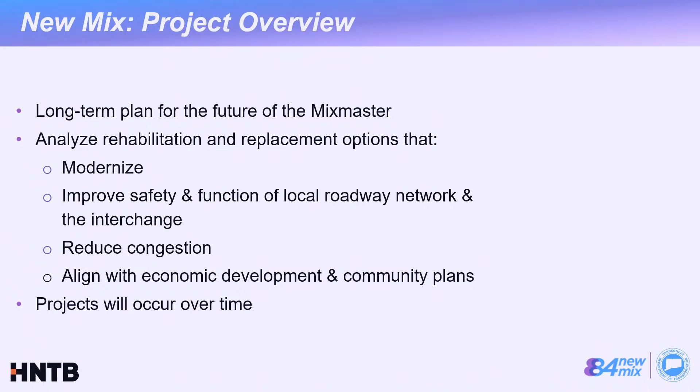So getting into these early action projects, they're smaller, standalone type projects that are either improvements to the highway or to the local roadway network. They're intended to improve safety and traffic operations. These have been coordinated with the City of Waterbury, and there's a review process that's separate from our New Mix Mixmaster study.

So this is the area that we're talking about, just to orient everybody. I-84 is running left to right across the screen. We've picked out some landmarks to orient you to where the features are. Route 8 is running top to bottom, with the Naugatuck River paralleling it.

These lines here in blue are the improvements to the local roadway network, and also on that stretch of 84 between exit 21 and 22 that my colleague Rudy will be going through later in the presentation.

To get into the project need of where this came about, this was identified when we were doing our initial analysis needs and deficiency study on the interchange, and this project materialized as a good project that would meet the criteria for an early action project.

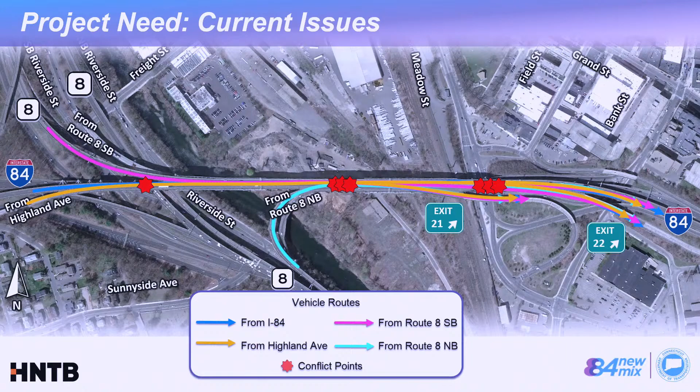Laying these all out on top of each other, with all these movements and decisions that cars need to make, we end up with a lot of these conflict points.

In our analysis, during that initial phase of the needs and deficiency study, we collected traffic data from 2017. What we're able to do with this traffic data is model it with engineering software - a program called VISSIM. It models traffic, so as you're seeing these rectangles, the larger ones are trucks and cars operating here on 84.

And this here is the entrance ramp from Route 8 northbound, coming up on the left. You can start to see the conflict points that we were identifying, where people are looking to make these decisions.

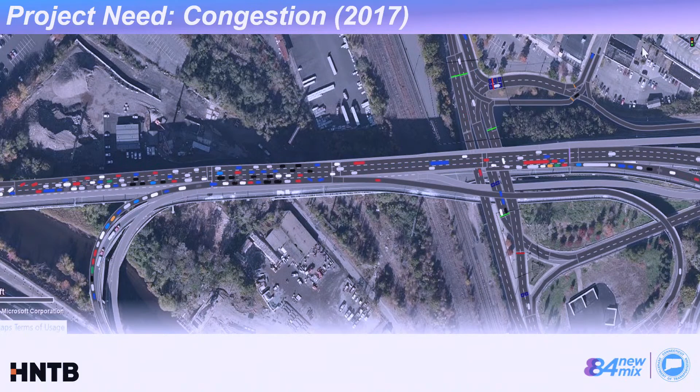Our long-term plan for the Mixmaster is to replace it in the year 2045. Showing you analysis from 2045 wouldn't have been useful, because by then the whole interchange would be replaced. So we did some smart analysis, and determined that in the year 2031 is where congestion and traffic operations on I-84 eastbound would really reach a failing point.

So this is how the traffic would operate. Doesn't want to play for me. One more try. All right, we're going to bypass that.

So then the traffic, similar to how it was in 2017, we were getting 14 more years, and it was really congesting Interstate 84 eastbound, causing long backups and queues on the interstate itself.

So just to recap the summary on the project need, we have a lot of substandard distances for the merges, weaves, and diverges. We have that short 350-foot auxiliary lane coming on from Route 8 northbound that drops off at exit 21. Another 740 feet further to the east, we have exit 22, a high crash location where we have recurring congestion and deficient traffic operations. And exit 21, highlighted there in red, that bridge is also in poor condition, which would need a major rehab. So that's the reason for the project.

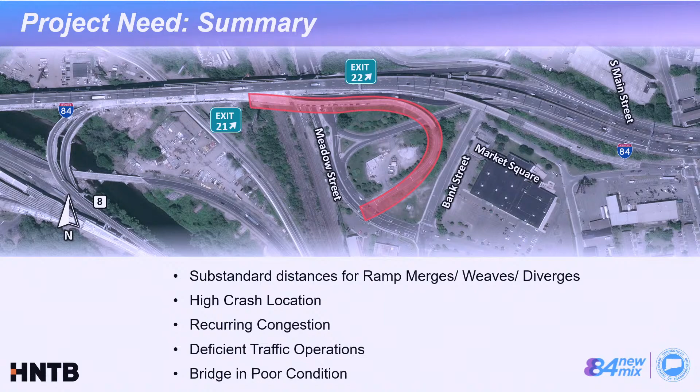Now I'm going to turn it over to my colleague Rudy Franciamore, who's going to walk you through what improvements we're going to make with this project to this area.

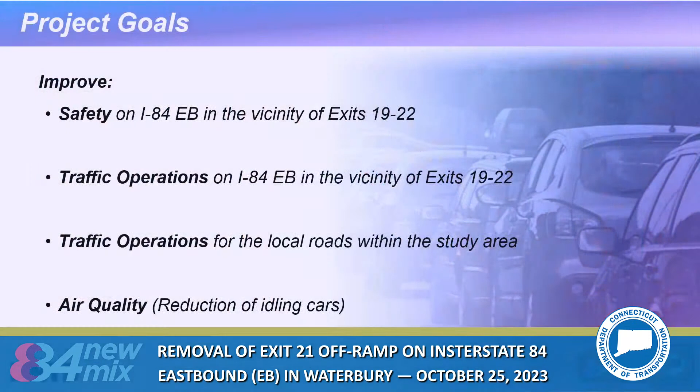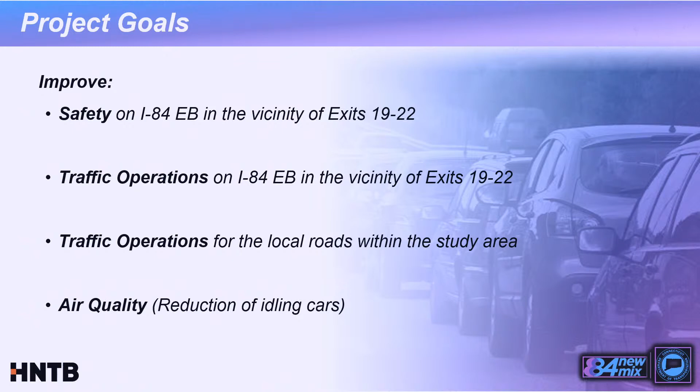Thank you, David. Again, my name is Rudy Franciamore. I'm the project manager for State Project 151-340, and I'm going to be getting into the proposed design for the project. The project goals are, number one, safety on I-84 in the vicinities of exits 19 to 22, as well as the traffic operations in that same area. Ancillary to that are the traffic operations to the local road network. As another benefit, we are anticipating air quality to improve in the area with the reduction of idling cars.

David explained in great detail the location. We determined that by closing exit 21, we're going to be able to dramatically reduce the amount of congestion through this area. That's also because we're going to be extending that auxiliary lane by 600 feet. To put that into perspective, that's about 2 football fields worth of extended lane. We're also going to be reducing the amount of the merge and diverge that happen quickly through this area, causing those safety concerns.

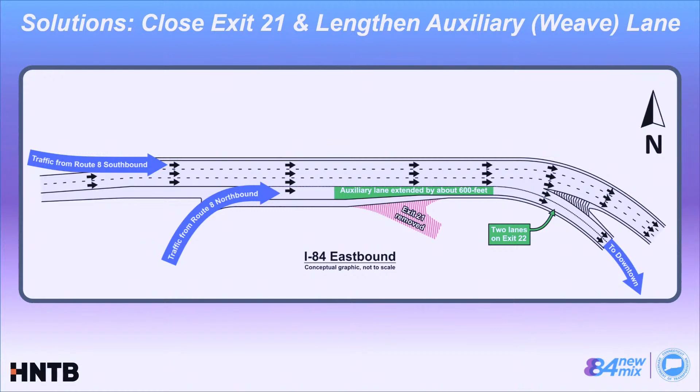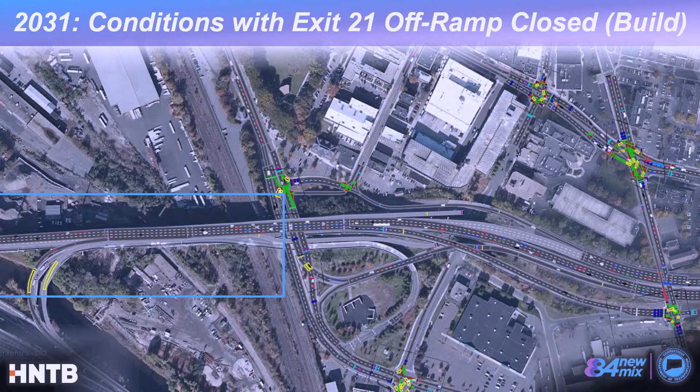So this is a video. 2031, as David was explaining, is the year that if we did nothing in this area, the traffic operations would totally break down. Traffic backups would be all the way back to roughly exit 18 to the west. This is the build condition with the exit closed. You can see the free-flowing traffic. This is done through our modeling program.

And this is the final part of the project at exit 22.

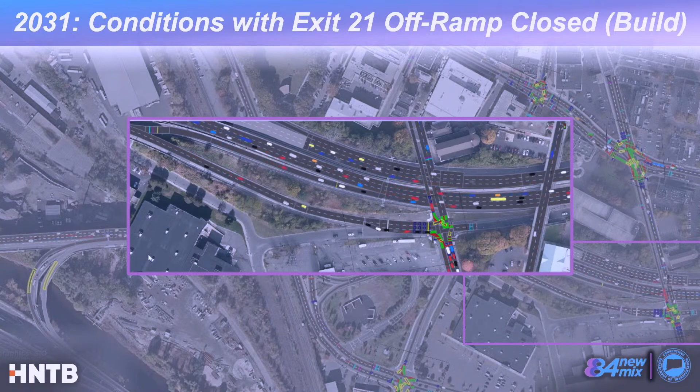Now, with the closure of exit 21, we recognize that all the traffic is going to be going off to exit 22. So we had to determine the project location, or the project limits, for this project along the local roadway network. We recognize that there were going to be improvements needed along the local roadway network. So what we did was figure out a local common area to determine the project limits, and we chose the train station on Meadow Street.

So with exit 21 closed, and with everyone traveling to exit 22, we determined that folks can either get off exit 22, head north on South Main, up Grand, and to the train station, or conversely, south on South Main to West Liberty, up Bank, and to Meadow to get to the train station.

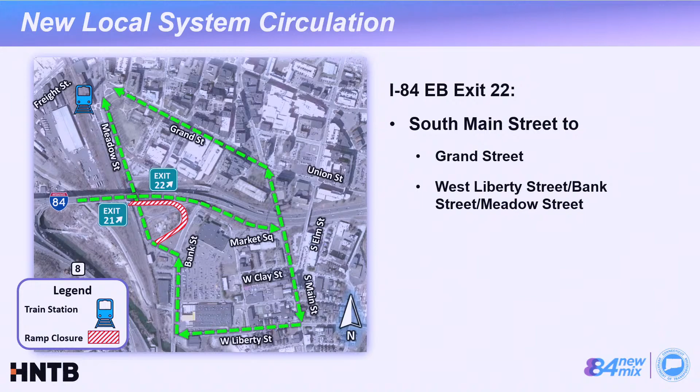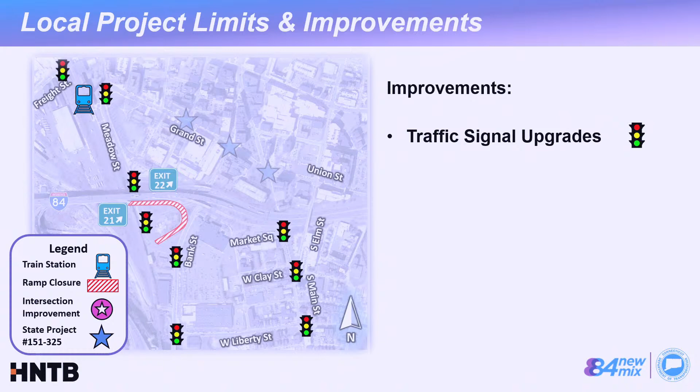The local project improvements that we've determined are needed for this project are going to be traffic signal upgrades along 8 of the intersections, formalizing parking where needed, and a big part of this project is to include bike, ped, and transit amenities. This is a big initiative of the Department of Transportation in Connecticut, to improve bike, ped, and transit safety. Lastly, we're going to be doing pavement restoration, sidewalk restoration, and pavement markings along the project routes shown here in yellow.

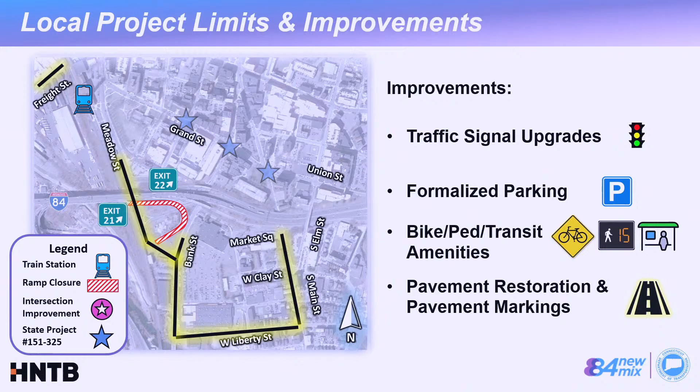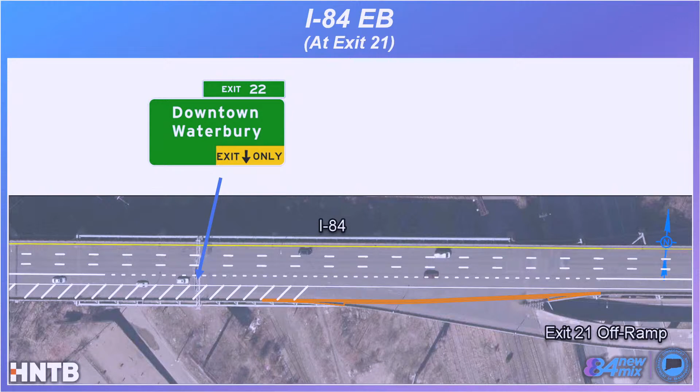The first area I'm going to focus on is the proposed design for the main line. This is 84 at exit 21. Currently it is temporarily closed, but in the previous condition, when the ramp was open, as David was explaining, it's a very short distance to get from the Route 8 on-ramp from the south and quickly get off at exit 21. And then you're also contending with all the different conflict points that we were discussing.

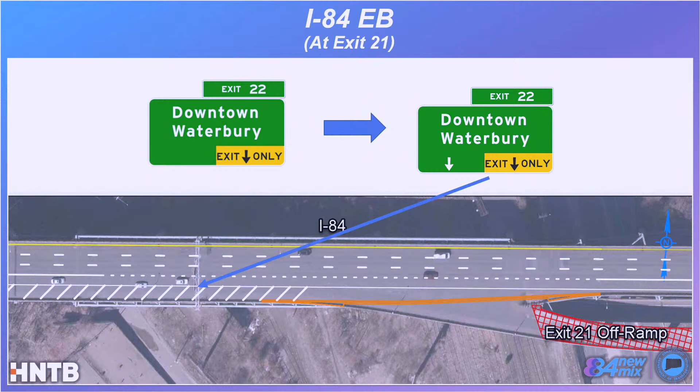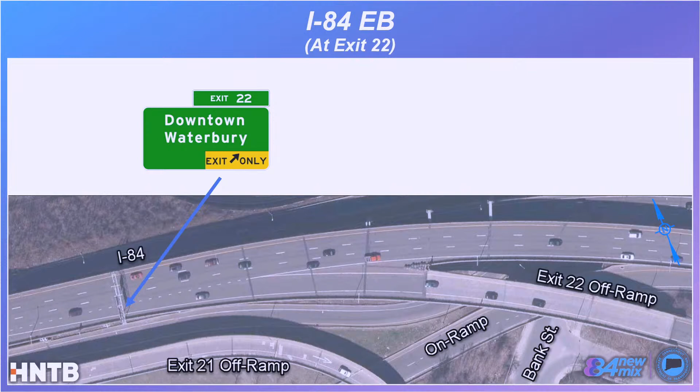In the proposed condition, which is similar to now, that auxiliary lane coming up from Route 8 northbound is going to continue on and be a lane drop at exit 22. This is the existing condition at exit 22, where people are merging into that third through lane on I-84 eastbound, and then exit 22 is a tapered style off-ramp.

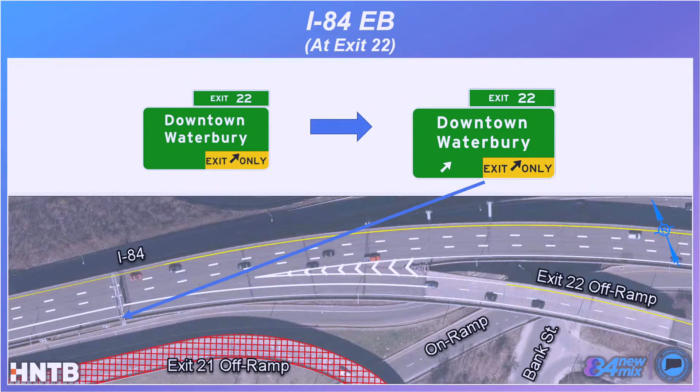In the proposed condition, we're going to be continuing that auxiliary lane from Route 8 northbound to exit 22, but we're also anticipating additional traffic on exit 22. So we're going to be creating this only through restriping—it's not going to be reconstructed, but we're going to restripe exit 22 to be a 2-lane off-ramp. And that third rightmost lane on 84 is going to become a decision lane to exit 22, so you can either continue on 84 eastbound or get off exit 22. It's called a decision lane, and this is, again, to anticipate the additional traffic that's going to be on exit 22.

So that's all the improvements we're proposing on the main line. With the additional traffic on exit 22, we're going to need some local roadway improvements. This is the first area we looked at: exit 22 at Market Square and South Main Street. The current roadway is a 3-lane roadway at the junction at the base of the ramp—a 12-foot left turn lane, a 12-foot through lane, and a 12-foot right turn lane.

In the proposed condition, to handle the traffic we analyzed, it's still going to be a 3-lane section, but we repurposed the lanes. It's still a left turn lane and a through lane, but the rightmost lane is also going to be a shared right and through lane.

It's important to note that we did look at eliminating the traffic signal at Market Square, but through the public outreach program earlier in the year, we discussed this with stakeholders in the area, and it was determined that Jarjuro's does need Market Square as part of their circulation with truck movements. So eliminating that awkward intersection with Market Square and the off-ramp was not going to be part of the project.

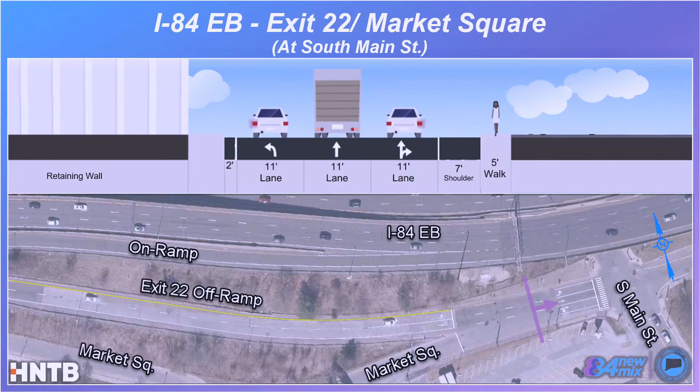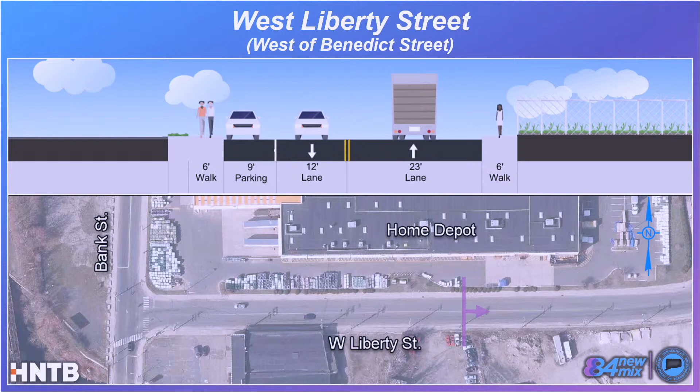Now I'm going to take you to West Liberty to orient people. This is the corner of Bank and West Liberty right at the Home Depot. The current roadway has a 9-foot parking lane on the north side of West Liberty. It also has 2 through lanes, one eastbound and one westbound. Also important to note, the south portion of the roadway does not allow parking—it's a no parking zone.

In the proposed condition, we took advantage of that space on the south side currently not allowed for parking, and incorporated some bike and pedestrian amenities. We're still keeping that 9-foot parking lane on the north curb line. We're introducing 2 12-foot lanes, one in each direction, with a 3-foot buffer to a bidirectional bike lane, 4 feet in each direction. The areas in orange are sidewalks that will be reconstructed along with pavement restoration through the area.

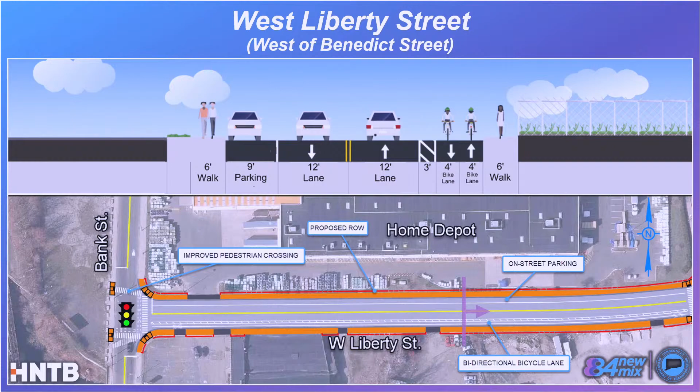Continuing on to the second half of West Liberty Street within the project limits. This is more of a residential area with multifamily homes, and it has parking on both sides of the street. Unfortunately, there was not enough width of the roadway to continue that bidirectional bike lane through West Liberty to make the bike facilities through the area more connected.

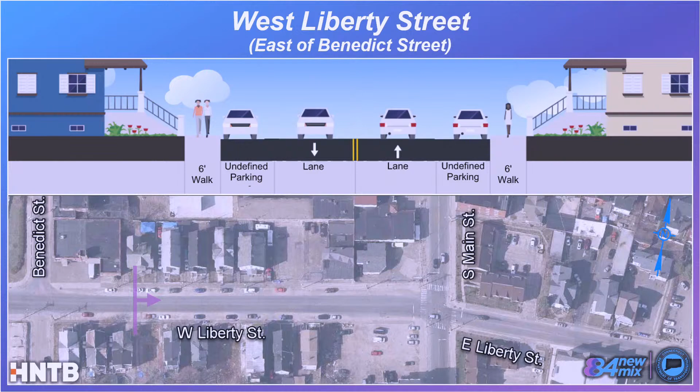The existing conditions have parking on both sides with 2 travel lanes, 2 12-foot travel lanes. In the proposed condition, we are proposing keeping the 2 9-foot parking lanes, but adding what's called a sharrow for the bicyclists through the area.

We also anticipated additional trucks at the intersection of South Main and West Liberty, coming off exit 22 and heading south on South Main Street. Without roadway reconstruction, just through striping, we realigned the center yellow line to better align with East Liberty, and that gives us 2 benefits. First, it realigns West Liberty better with East Liberty, since right now it's an offset intersection. Second, by adding that small yellow painted island, we're providing additional room for tractor trailer trucks to make that turn around the corner. We are not impacting any of the corners at this intersection.

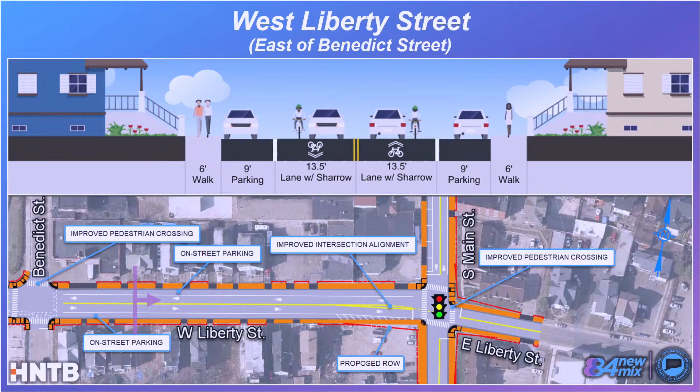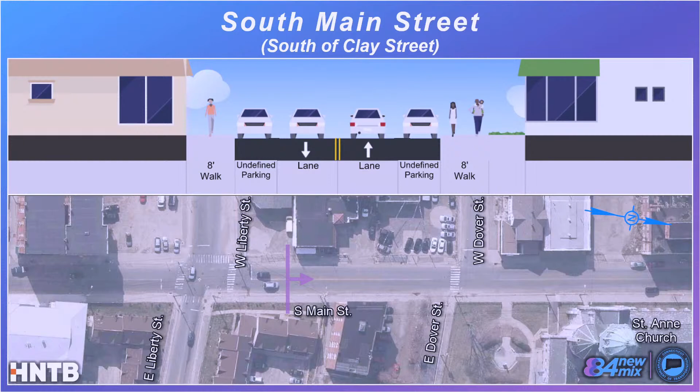So in the proposed condition, from West Liberty moving north, we're proposing to eliminate the parking on the east curb line—north pointing to the right side of the screen. So on the lower part of the screen, we're eliminating that parking, giving a little more room for the traveling public. We're going to be providing 2 11-foot lanes and formalizing the parking on the opposite curb line, as you see here.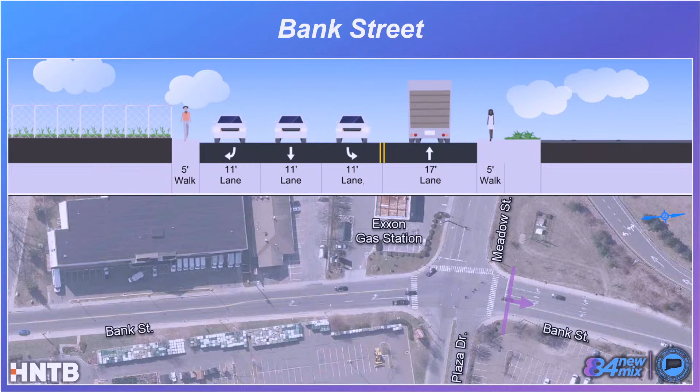This is the area of Bank Street and Meadow Street, and also the entrance to the Home Depot Plaza. Currently, where you see that purple arrow, we have an 11-foot right turn lane, an 11-foot through lane, and an 11-foot left turn lane, with a 17-foot northbound through lane.

In the proposed condition, we looked at the traffic volumes and realized there's not that many cars taking that right turn from Bank Street onto Meadow Street. The numbers just weren't showing that need. So to improve pedestrian crossings, we introduced a road diet on that portion of Bank Street, eliminating that right turn lane and making it a shared through right turn lane, as shown on the upper portion of the screen.

We are still providing the left turn lane to the Home Depot Plaza, and the same through lane northbound.

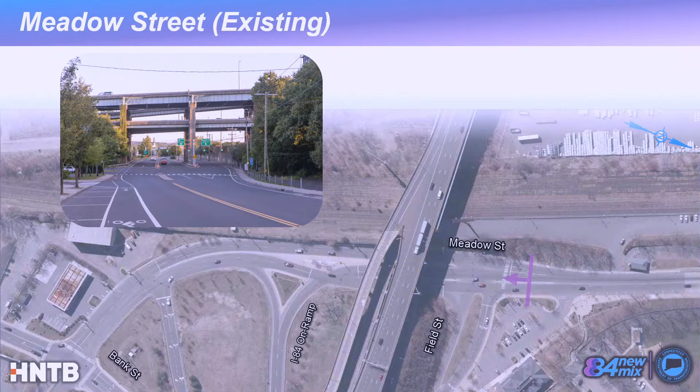So what we're proposing is a northbound through lane on Meadow Street, with north facing to the right of the screen. We're going to provide a channelized right turn onto the I-84 eastbound on-ramp, and a through lane in the northbound direction as well as left turn lanes. The best part of this section of the project is we're repurposing all that additional pavement into a protected bidirectional bike path.

This is a close-up of the area. Up on the top of the screen, you can see the massive amount of space that the numbers show is not needed. We have, on the left, a right turn lane from Meadow to Bank, a shared through and left turn lane, and a second shared through turn lane with the northbound lane heading towards Field Street.

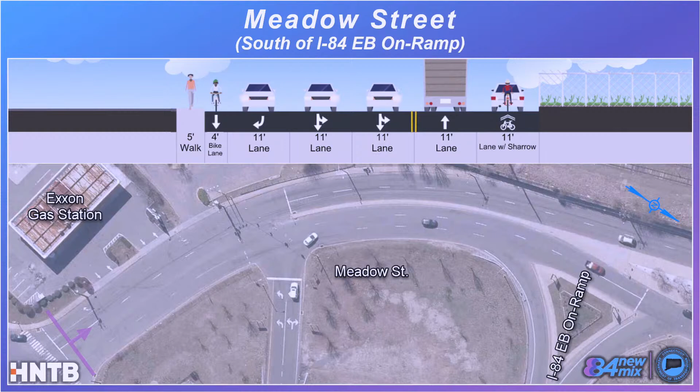In the proposed condition, we eliminate those two northbound lanes and put everything to the east of that bridge pier. We're providing a northbound through lane with a painted island, a left turn lane southbound, a through lane southbound, and a right turn lane southbound.

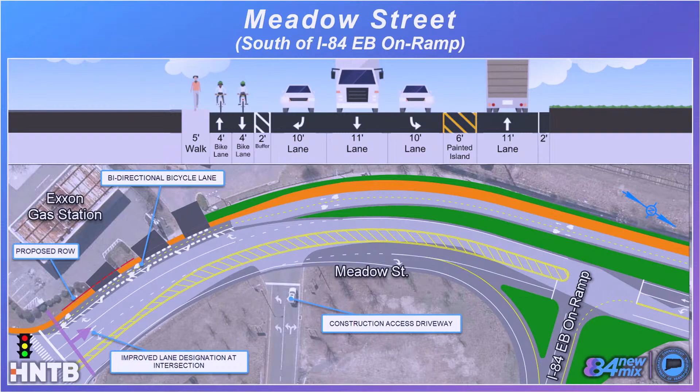This is where the bidirectional bike path starts. It starts right at Bank Street and continues north, and once you get to a certain point, it becomes protected with a landscaped island.

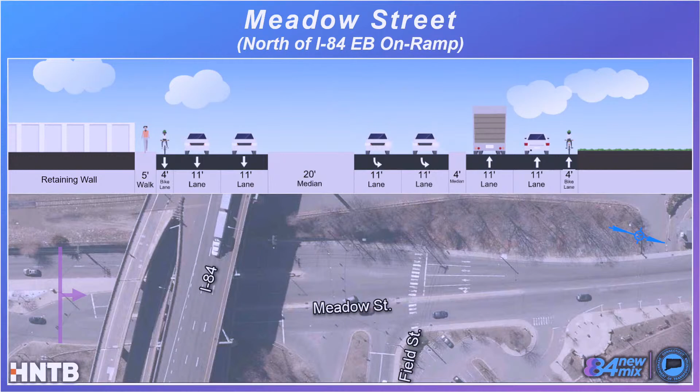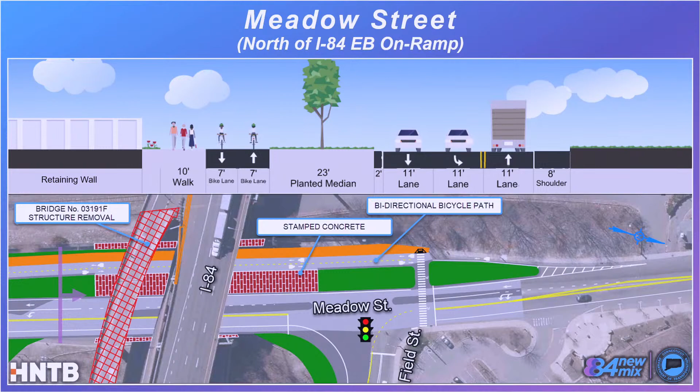In the proposed condition, we're eliminating those two lanes, repurposing them into a protected bidirectional bike path that will connect to the existing bike paths continuing on to Freight Street. You see two 7-foot lanes for the bikes. It's either going to be a landscaped median, or the area underneath the stack will be some sort of stamped concrete to match other areas of the city. Once you get beyond the stack, it'll continue to be a landscaped island.

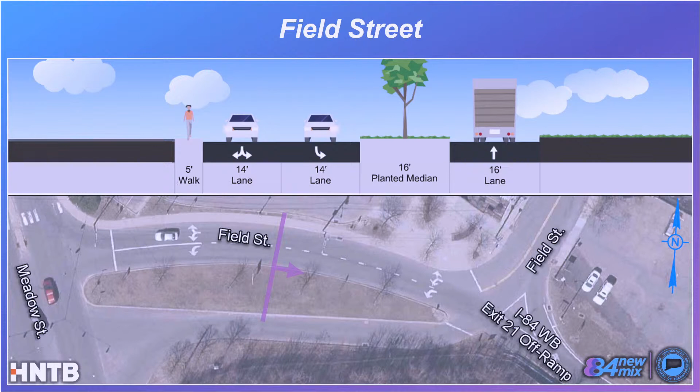The last portion of this area is Field Street. Right now there's two lanes heading towards Meadow Street—a left and a right turn lane, and then an exclusive left turn lane onto Meadow Street with this very large and awkward painted landscaped island. And then a through lane continuing on Field Street in the eastbound direction.

We wanted to simplify this intersection, so we made the landscaped island smaller, and we also improved the sight distance on Field Street as it approaches the Exit 21 off-ramp. The Exit 21 off-ramp is a continuous off-ramp; it does not have a stop condition at Field Street, and this proposed design will improve the sight distance at that intersection.

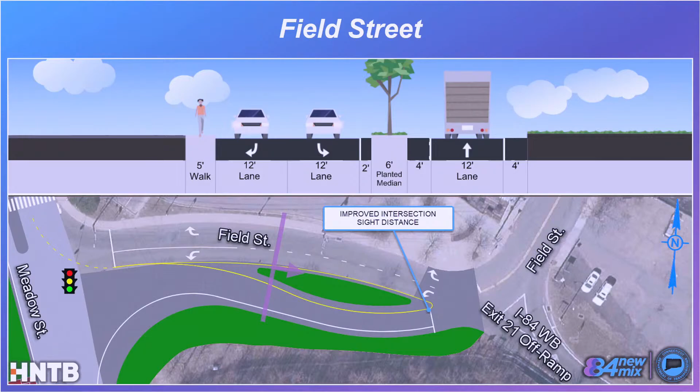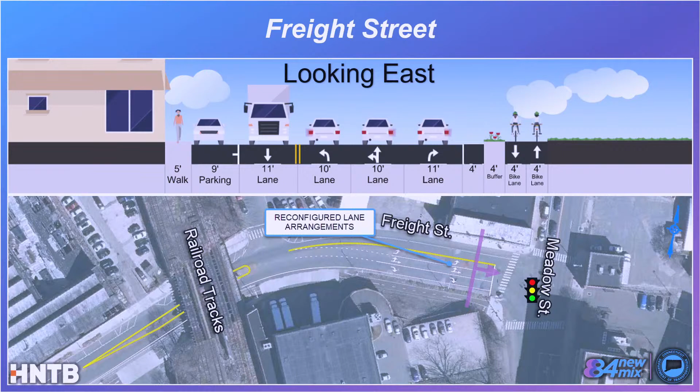I will now pass the presentation to Zach Garino, who's going to talk about the right-of-way process.

I'll continue with one more slide. Sorry about that. The rights-of-way—Zach is going to discuss the process of the rights-of-way.

The project consists of 28 temporary easements—construction easements that the contractor needs to build something near your property. Those end at the end of construction, which is why we call them temporary. There are 3 partial acquisitions and 6 traffic easements, needed to incorporate new traffic signal equipment in areas requiring additional space. We have 3 easements for intersection sight distance and sight line, improving the local roadway network. There's another easement needed for the slope to support the highway in one particular area, and one last easement for the installation and maintenance of the bus shelter on South Main Street.

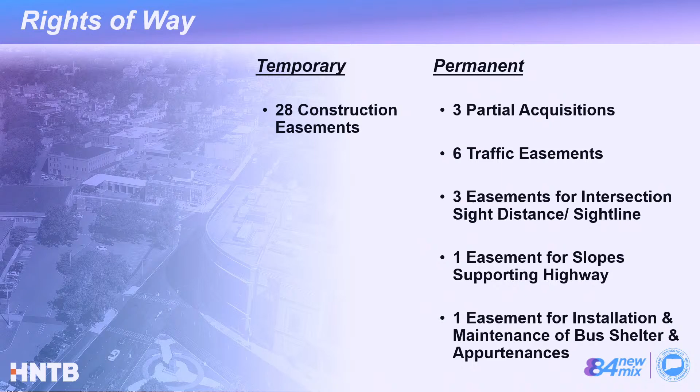I will now pass the presentation on to Zach Garino, who will discuss the right-of-way process.

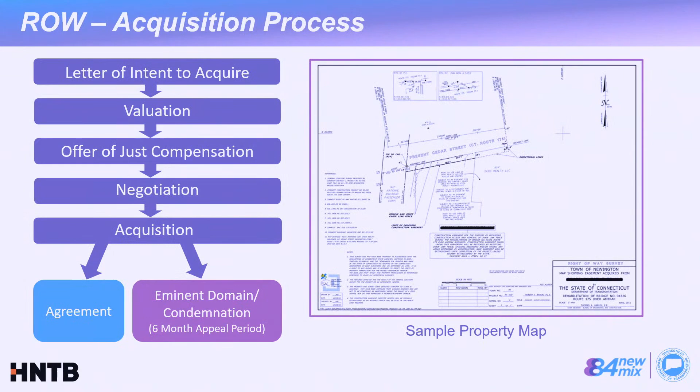Next, our office will determine the fair market value of those property rights that were depicted on the property map, and will be used to establish an offer of just compensation. That offer will be sent to the property owner in writing, and a right-of-way agent will be available to meet with the property owner and explain the project, go over the specific impacts to their property, and explain how the state arrived at its offer.

The property owner will be given a reasonable amount of time, typically 30 days, to consider the state's offer and enter into negotiations. When an agreement is reached, the department will prepare all the necessary paperwork to record the deed and property map on the town land records. However, if agreement cannot be reached, in order to keep on schedule, the department may acquire the necessary property rights through its power of eminent domain.

In that event, the state files a notice of condemnation in the Superior Court, along with a monetary deposit in the amount of the state's offer. The owner would have 6 months from that date to file an appeal if they felt that the state's offer was inadequate. Whether or not the owner chooses to appeal, the money deposited in the court is available to be withdrawn by the owner. It's important to note that the state only acquires property rights that are needed for this particular project.

If there are any questions specific to the right-of-way acquisition process, I can answer them after the presentation. And with that, I'll hand it over to Rudy to finish up. Thank you.

Thank you, Zach. Next, I'm going to be talking about the construction cost of the project. This is still at the preliminary design phase of the project, but we are anticipating about a $20.8 million construction cost with a right-of-way cost of about $630,000 for a grand total of $21.4 million. 80% is going to be federally funded, and the other 20% is going to be state funded.

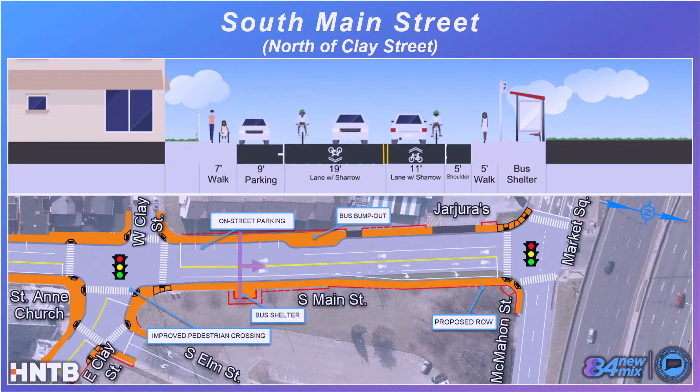Let me just get to the one on. You can see it here, right on the corner of Meadow Street and Bank Street. In order to fit the lane configurations that we're proposing, it's a sliver take.

It's not a full acquisition or anything like that. There are others that are from the city of Waterbury, like for the right turn lane from South Main Street to McMahon. That one is another sliver take, but that's from the city of Waterbury.